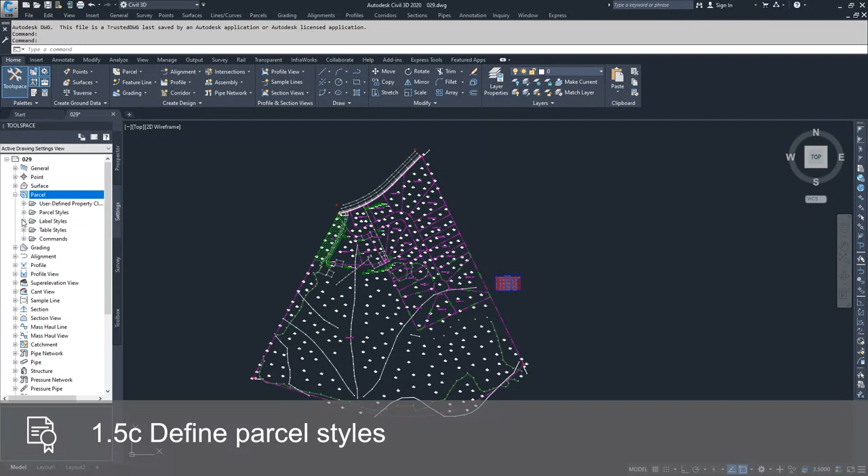I'm going to go to Label Styles, and there are three types of label styles inside Civil 3D for parcels. There are area label styles, line label styles, and curve label styles. The method to modify and create new label styles is the same across all three of these label styles. It's just the information inside of those labels that is different. We're going to be dealing with area label styles in this video.

So what we're going to do is drop down on the Areas folder for the label styles. And what you can see here is we have two label styles that are currently being used in the drawing, which is signified by the gold triangle in the upper corner. If you wanted to edit either of these or edit one that we haven't used yet, what you can do is select that label style, right click, and choose Edit.

What I'm going to do is create a new label style that has a little bit more information than any of the label styles that are available in the drawing right now. If you create a new one, you would click on Area, right click, and choose New. But what I know is all of these label styles are currently being displayed the way that I want them to be displayed in my drawing. They just don't have enough of the information that I want.

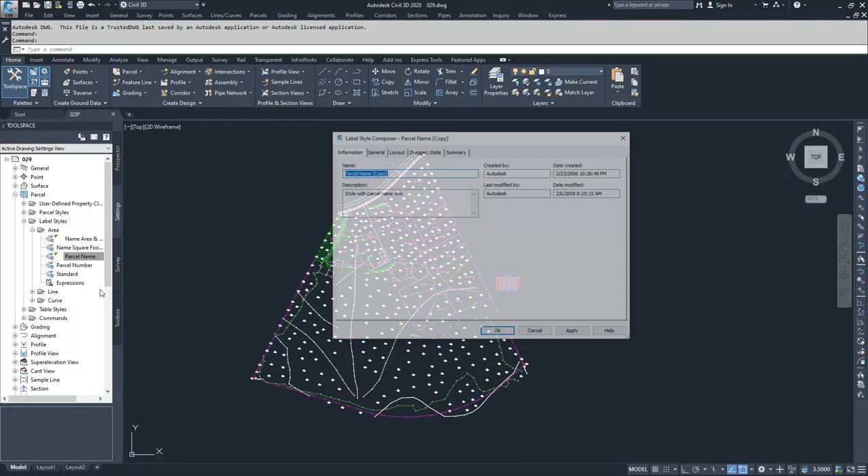So I want to start off with the base information inside of one of these label styles already, and then I'm going to modify it and create a new version, but I don't want to change the existing one that's in the drawing. So the way I'm going to do that is by copying a label style. You can copy a label style by selecting the label that you want to use as your basis, and then you can select Copy instead of Edit. So I'm going to copy it, and now you see in the name it says Parcel Name Copy.

What I'm going to do is add parcel name. I'm going to say dash square feet dash acreage dash perimeter. I'm going to delete out my description, and then I'm going to move on to the General tab. Because I know that this displays the way I want it to, I'm not going to modify any of these items.

But what you could do if you wanted to is modify your text style, your label visibility, the layer that your text is going to be displayed on, the orientation or behavior of your text, whether or not it's readable, what the bias for that readability is, and whether or not you want to flip your anchors based on that readability. So next we're going to move on to the Layout tab.

Oftentimes, inside of area labels, you're only going to have one component and you're just going to stack all your text together. In label styles for lines and curves, you may have multiple components, and to add a component you drop down on this and choose add text, add a line, or add a block, and that will be a new component that's added to your label.

For this label style, I'm going to go ahead and leave it as just a single component, and then I'm going to move down through this. And so what we have here is we have what the name of this is going to be. I'm going to go ahead and change it so that it says number, square feet, acre, perimeter. And then I'm going to move down.

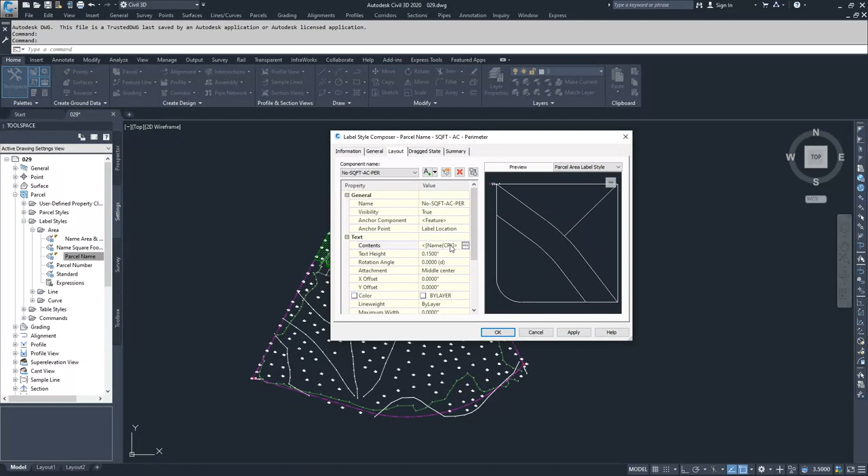So now we move on to the contents. We are going to go ahead and modify this. We know we want to have the name of the parcel, but we also want to have some other information. So we're going to go ahead and type area down here with the colon, and then we're going to go ahead and drop down into here, choose parcel area, select square feet, and hit the arrow over to populate that information. And then I'm going to make sure that the numbers that show up with that area we know is square feet. So I'm going to type SQFT for square feet, and then I'm going to hit enter.

I'm going to choose parcel area again. I'm going to drop down and I'm going to choose acreage, and I'm going to hit the arrow over to populate acreage, and I'm going to hit AC for acreage, and then I'm going to hit enter again. I'm going to type in perimeter, and I am going to give it a colon and a space, and then I will drop down in here and choose parcel perimeter. I'm going to have it as feet. I'm going to hit the arrow to populate it across into the window, and then I'm going to give it a foot symbol signifier, and then I'm going to jump over into my Format tab.

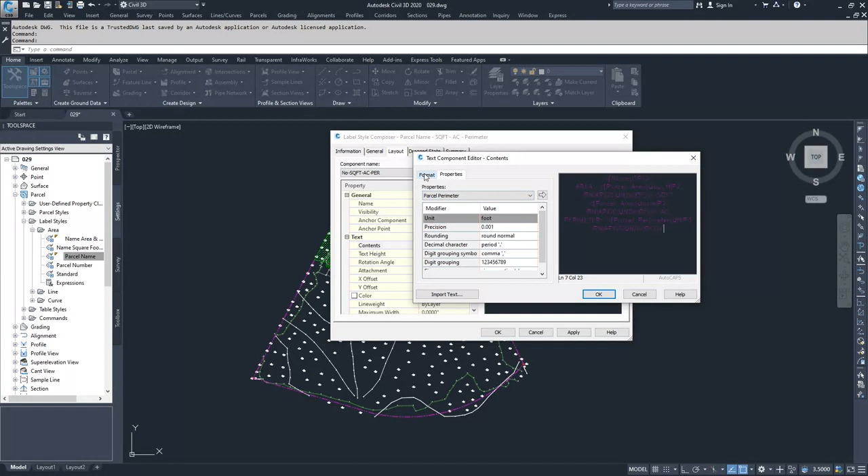So the Format tab is how you can choose your text style here. You can choose justification, your color, and that kind of information. So what I want to do is I want to have this all be right justified. So I'm going to go ahead and select right, and then I'm going to hit OK, and then I'm going to hit apply and hit OK.

So if you wanted to, you could now apply this to your drawing by going up to annotate, add labels, parcel, add parcel labels, and you could choose replace area, choose the area label that you want, which is our parcel name, square feet, acreage, perimeter. And then you could choose add and then pick on the parcel that you want to change.

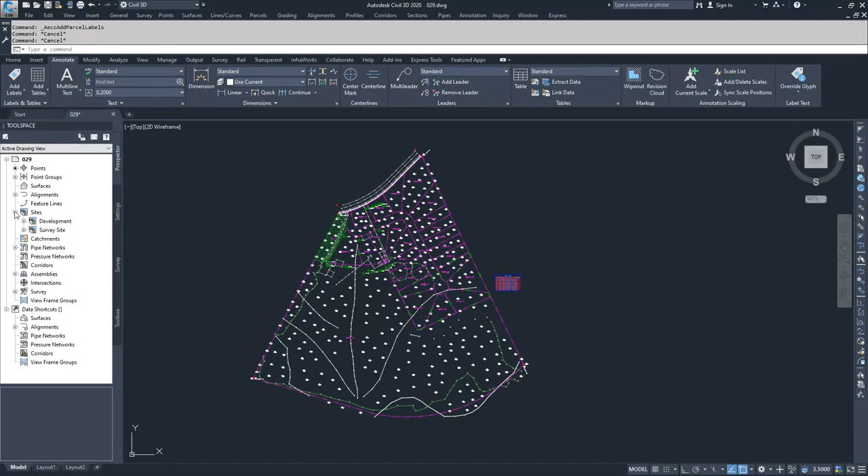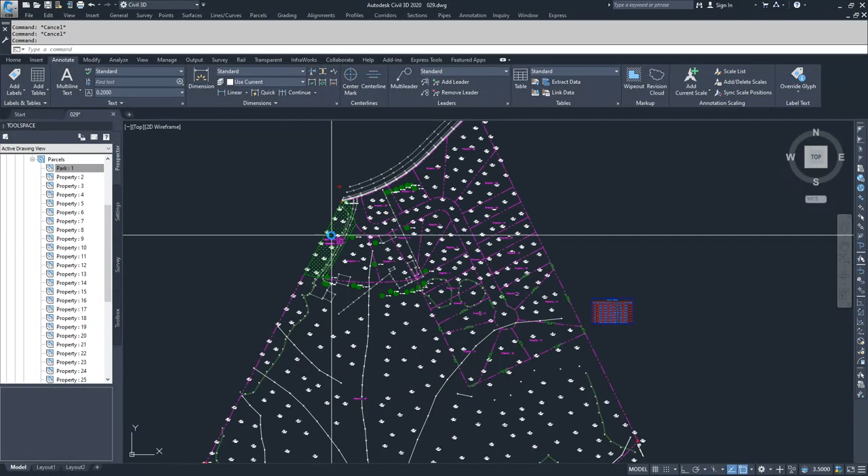Or what you can do is you can navigate to where your parcel is. So I know it's in sites, I know it's in development, I know it's in parcels, I know I want to change park 1. So I can right click on that and choose properties. And then under the composition tab, you can drop down and select the type of area label you want. So I'm going to do parcel name, square footage, acreage, perimeter, and I'm going to hit apply and hit OK. And what you'll see when I zoom in on this park now is I have the name, the area in square feet, the area in acreage, and the perimeter in feet.